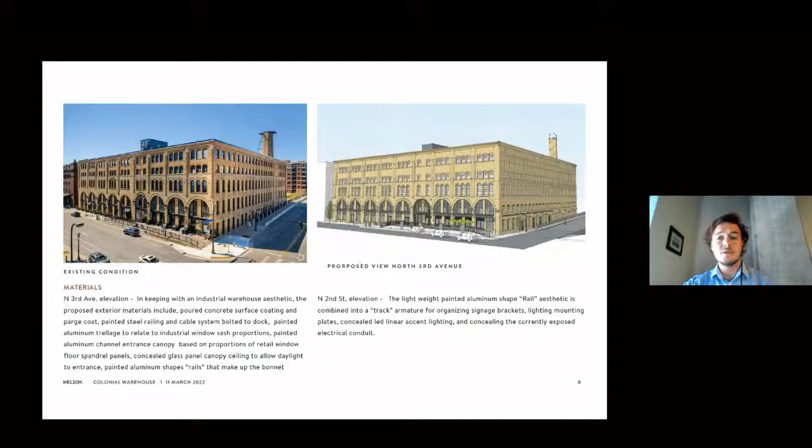There will also be repair of the historic front elevation loading dock that I mentioned, and replacement of the non-historic handrails, proposed by the applicant to be replaced with vertical balusters and horizontal wire, including removable planters at these locations as well. Next slide, please.

The applicants are also proposing the installation of contemporary lighting at various locations at the primary elevations. Non-historic lights already exist in some of these locations, and the proposed designs replacing these primary elevation lightings would be smaller and less noticeable.

The existing lights, and I'll show pictures later of these, are funnel-like lights at the second story that provide uplighting, and then gooseneck standard industrial type contemporary lights at the first story level.

Lastly, the applicants are proposing the construction of a rear, which is the west or northwest elevation canopy, and alteration of the entry ramp features there, as well as painting of the tenant doors on the side, which again is the north or northeast elevation.

The applicants have suggested that these proposed changes are desired to make the building more appealing to potential commercial tenants and customers. The project team has not yet shown that some of the proposed alterations would be necessary to receive the desired outcome of increased visitors and commercial activity that they expressed.

The applicant team has responded to early staff feedback. They've been able to work with staff and changed parts of the project scope to deliver what you're seeing here in front of you today. Staff has encouraged the applicants throughout all this to propose fewer changes to the building's primary elevations.

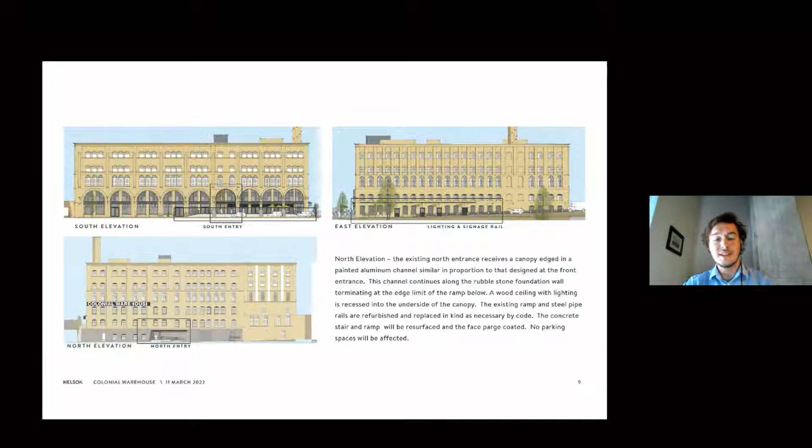Staff is requesting feedback on the project design based on the Minneapolis Warehouse Historic District Design Guidelines, and of course the Secretary of the Interior Standards for Rehabilitation. Specifically, we are requesting feedback on 3 questions, which you will have noted in the memo in front of you to review. What I'll do now is just go over those 3 questions and clarify staff's concern, and then I'll leave that up to you, Chair Howard, and other commissioners, how you want to respond to that in the discussion period.

So the first question that staff had was, do commissioners have concerns regarding the proposed changes to the public right-of-way? The current non-historic balustrade at the historic loading dock is contemporary and compatible. Staff has expressed concern about altering this further to a horizontal wire design, a type of design that's a contemporary trend that staff frequently considers to be incompatible at primary elevations.

We routinely condition for removal of this type of proposal in applications that come in front of us. Usually when we would condition for removal of that proposal, a wire type design railing, we would recommend something similar to what's existing there currently.

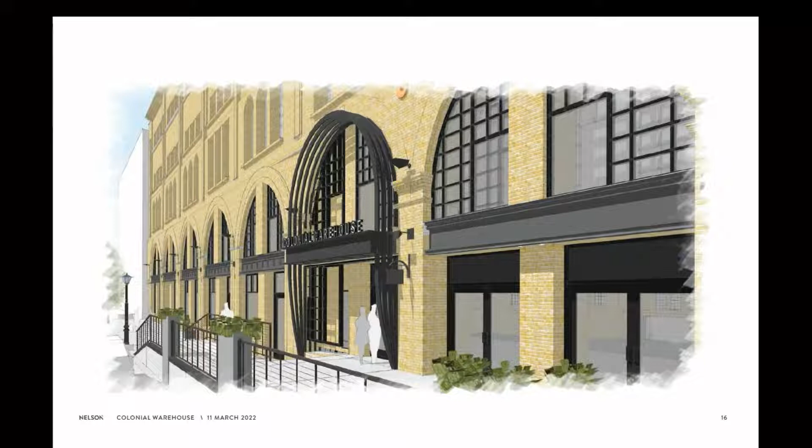It's a rendering from the 11th of March showing the arched openings. I assume it's of the front of the building, let's call it North 3rd Avenue. What we're trying to do here, the overall goal of this project, is to create historic appreciation—to return the legacy of this building and the public's awareness of the original aspects of this building, built as the powerhouse for the Minneapolis Street Railway. So the rails become a theme that we're using in a very subtle, light-handed way to establish that.

The other thing we're trying to do is improve the tenant experience in this project. As mentioned, there's a lot of capital improvements and investment being made on the interior of this 200,000 square foot building.

The market is telling us that the outside also needs an upgrade, whether for the tenant experience and their pride entering and exiting this building every day, or for the retailers, as you can see from the wear and tear on the loading dock, which is City of Minneapolis property. We've contacted the Public Works Commission about some interventions we'd like to propose on that dock.

The third goal would be to increase neighborhood vitality, make better connections with the public realm, clean up the building, simplify it, and especially on North 2nd Street, the retail there is compromised, and the street, especially on this side, lacks vitality. I know there's a lot of public and private investment in projects across the street from this.

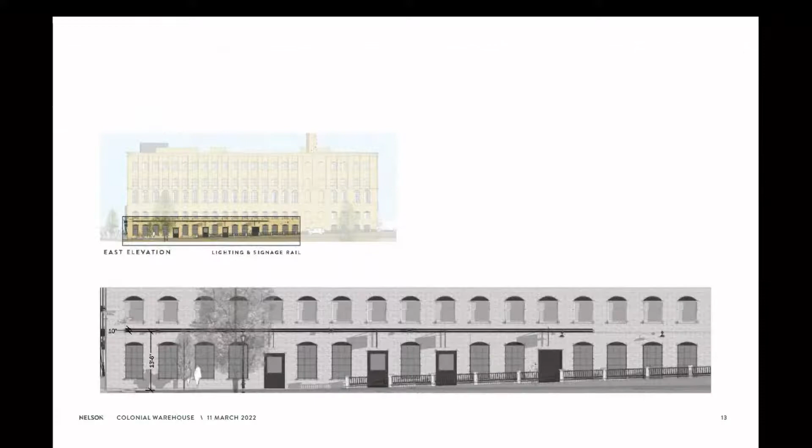Let's say slide 8. You'll see an existing view of the building with our proposed changes. What we're trying to do here is show that the embellishments we're putting on this building make for an apples-to-apples comparison. In the scale of things, they are pretty minor, we believe—we're trying to keep them very light.

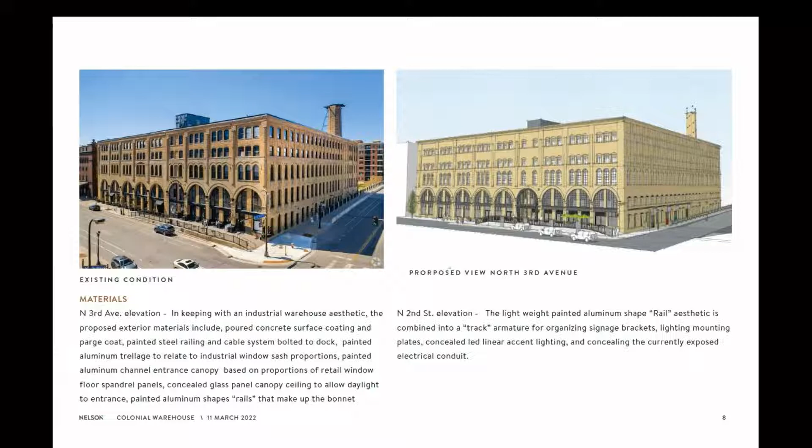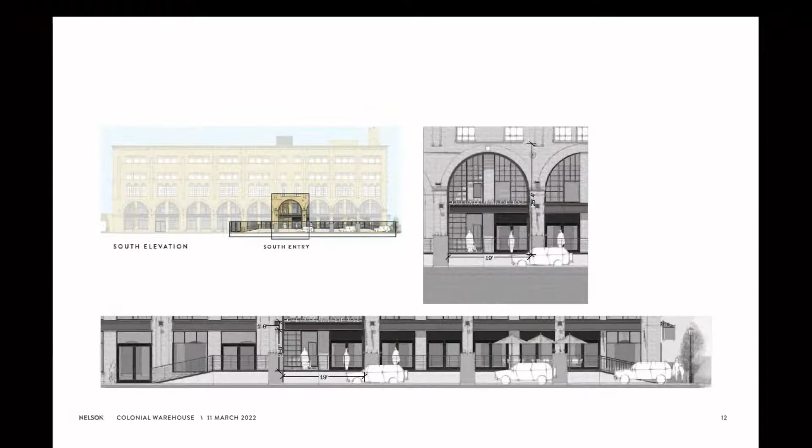I would then just go to slide 15, perhaps—it's a view of the entrance. We understand from reviewers' comments that the rails up front, in a wire system with steel, might not be the appropriate thing. We were just reacting to what was at the hotel next door and trying to be contextual, but we certainly could investigate how those rails look.

One thought is that a lighter rail system actually opens up the view to the building as well, which is really the goal—to accentuate the building itself, not the rail. The planters actually let the rail pass through; it's just a small planter on top that sits above the 42-inch rail. They're movable, not fixed—just on some leveling legs, made out of an oil-rubbed dark steel. Those help define the rhythm of the piers, pulling it out to the face of the building while remaining non-permanent.

From this view you can also see the signage we are proposing, and the trellage we place within the arch—it's trying to mimic the left and right of every arch. That's still to be worked out a little, but the main purpose of this entrance, or the main goal we're trying to get recommendations or feedback on, is that acknowledgement of the arch in this lightweight rail.

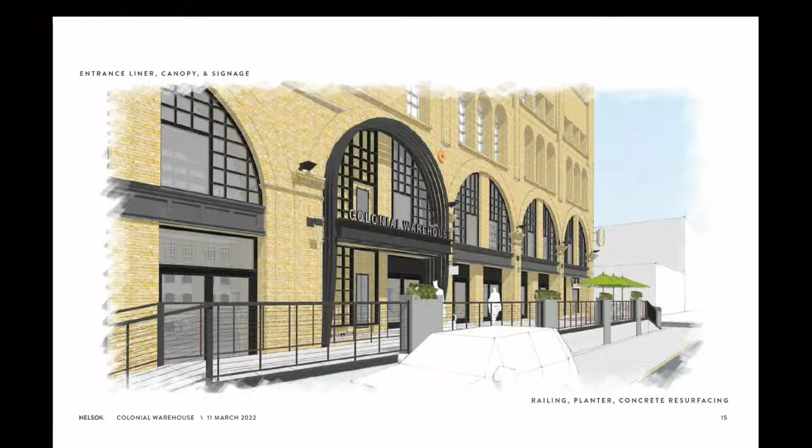If you go to the next slide, we think it's sort of ever-changing—as you see it from the oblique, or frontally, it almost disappears at a certain point, and light still passes through it. Its lightweight construction will also minimize the amount of connection we have to make back to the building structurally. That's essentially it for the front of the building.

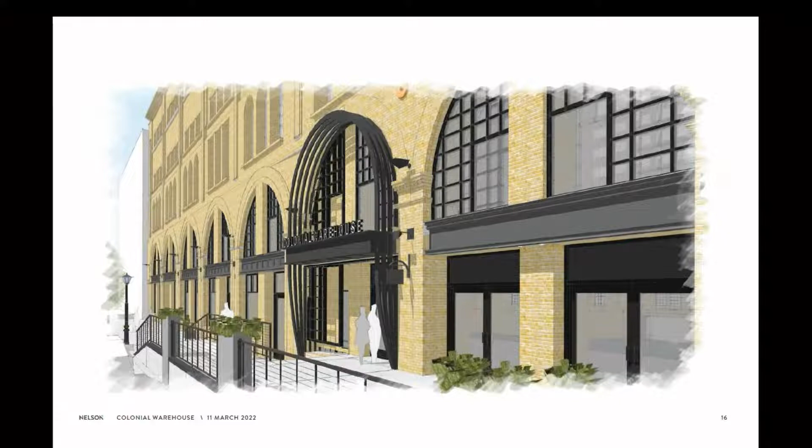What we're trying to accomplish here is, by using that lightweight armature made of the same rails used to wrap the front of the entrance, to unify all 3 retailers with a horizontal line that lines up with the existing 2nd floor, creating that armature. It may have a little bit of LED lighting coming through, hopefully some warm tones, and color on the doors, plus signage placards hung higher up than they currently are.

Again, what we're trying to say is that you would see Madewell and Lululemon, these businesses on 2nd Street, North 2nd Street, and then the businesses on 3rd Street on the south side of our building. The next slide, slide 22.

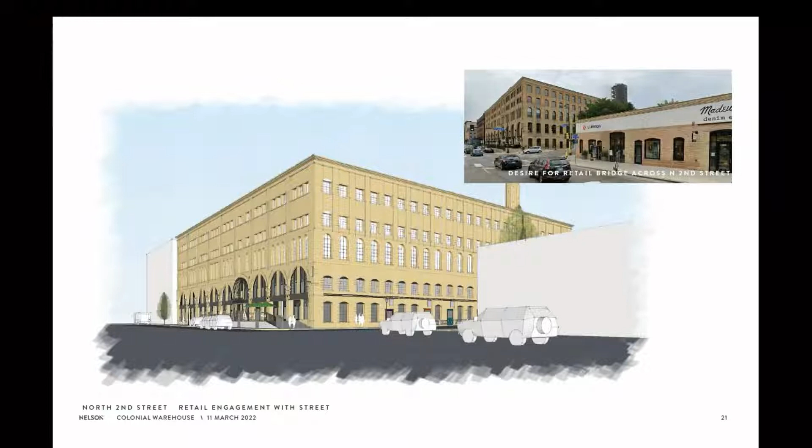Those are the rails that we would be applying to the building to conceal the conduit, conceal the lighting, and create the armature for passing lighting and passing signage. We began to hint that perhaps some brighter colors on the doors of those 3 retailers could give a little more vibrancy than what you see in the existing photos.

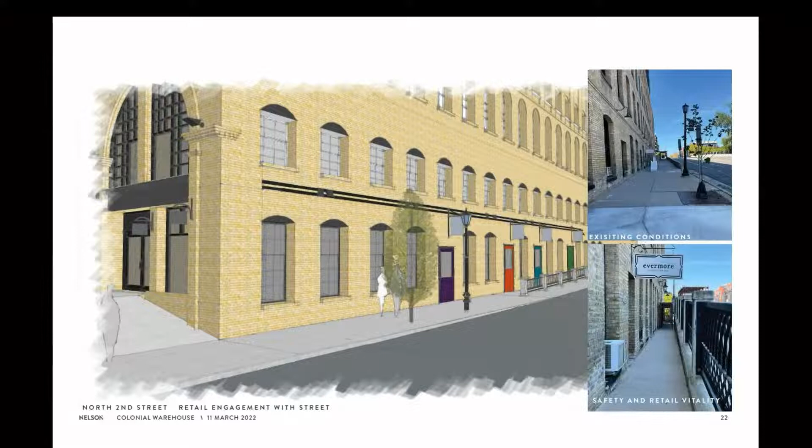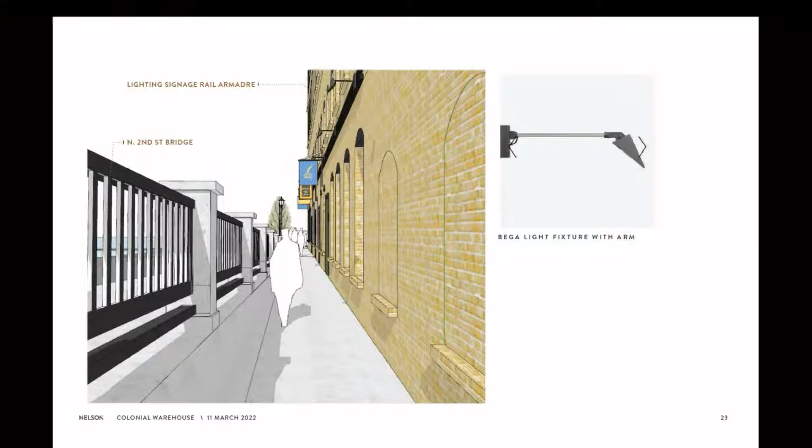The next slide, 23, shows the bridge we have in trying to make this successful retail. The next slide, 24, which I think you've all had a chance to look at, begins to talk about the detailing of this piece.

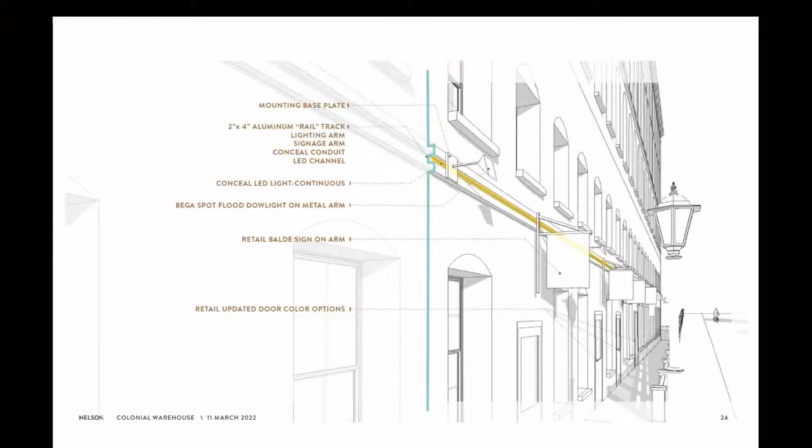Lastly, page 25, you can see in the existing conditions what I'll call the north entrance, at the lowest level of the building. We want to make this a much more appealing tenant entrance and increase its safety and weather protection.

You can see in the existing photo that the place does need a little bit of cleanup, and this intervention could create a nice, inviting entrance, but it's still using the existing rails and stairs that would just be improved or upgraded.

So those are the presentation comments that I wanted to make clear to everybody.

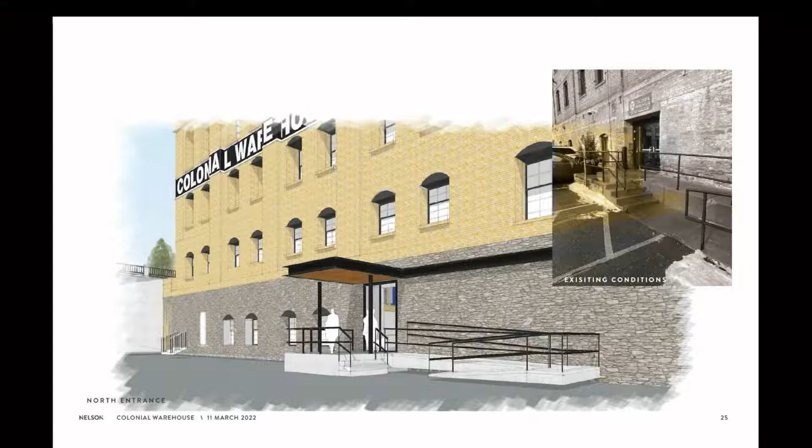Thank you for those wonderful explanations. Before we get into discussion, I just wanted to check with commissioners: do you have any specific questions for the applicant?

Again, I'm not seeing any coming in. So let's discuss, commissioners. Let's try to look at those 3 questions specifically that staff have requested feedback on. Rob has specifically asked for information on the proposed changes to the public right-of-way, the addition of the metal embellishments, and changes to the signs that have been approved through the master sign plan. Does anyone want to kick off the discussion and try to get some feedback to the applicant?

Everyone's very talkative again tonight. Thank you, Commissioner Sandbolt.

Thank you, Chair Howard. So I guess I'll try to voice some feedback on these items. I am appreciative that the applicant is thinking about the implications of some of these additions, especially from the perspective of how they will be anchored to the building and how attachments will be made.